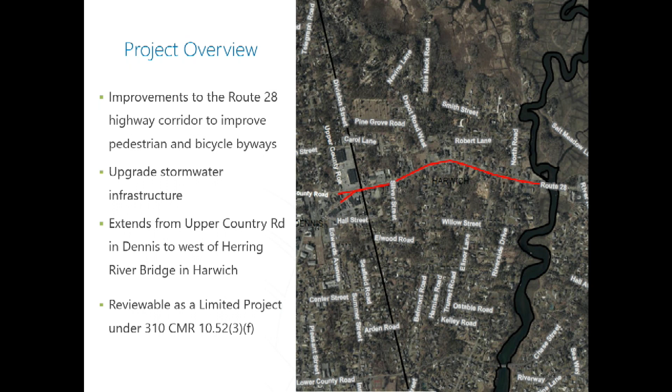Quick project overview: this project proposes improvements to the Route 28 highway corridor to improve pedestrian and bicycle byways, as well as upgrade the stormwater infrastructure. It extends from Upper County Road in Dennis to just west of the Herring River Bridge in Harwich. The work is reviewable as a limited project under 310 CMR 10.52(3)(f).

Looking at the wetland resource areas we're working in proximity to, we have the Herring River, which supports land underwater, land subject to coastal storm flowage, riverfront area, bank, bordering vegetated wetland, salt marsh, and the associated 100-foot buffer zone and 50-foot no disturb zone.

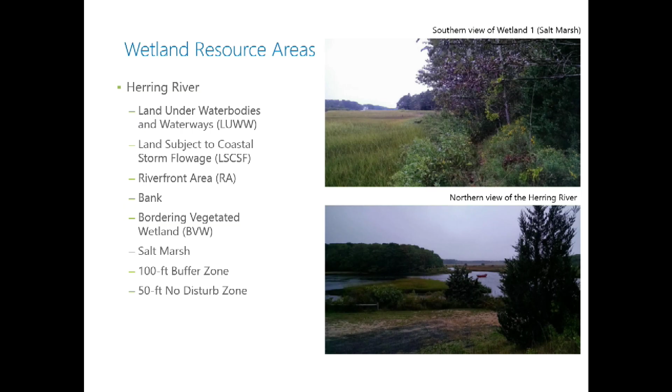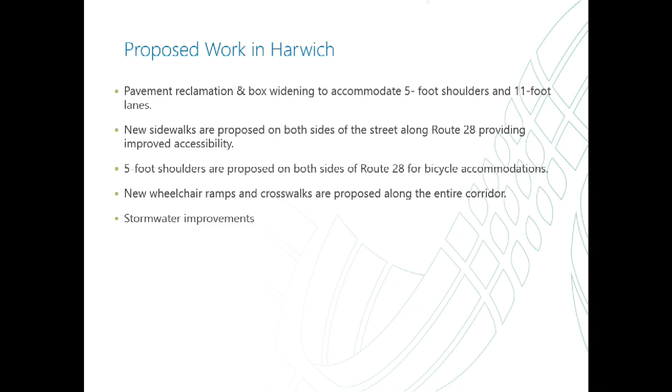I'll tell you more about the proposed work. Overall, the entire project from Dennis into Harwich proposes to widen the roadway via reclamation of the existing pavement and box widening, to get a consistent roadway section of 11-foot lanes and 5-foot shoulders. This will reconstruct portions of the road with existing sidewalks, and add sidewalk where there isn't any, giving complete pedestrian accommodation on the north and south sides, connecting from the Herring River Bridge into downtown Dennisport.

As part of that work, there will be new ADA-compliant pedestrian curb ramps and driveway transitions built into the sidewalk on each side of the road, making this a fully ADA-compliant project.

Underground, where we won't see it in the end, there will be significant stormwater upgrades to the corridor. We'll go into more detail later, but there's a lot of sporadic drainage which will be improved with this work.

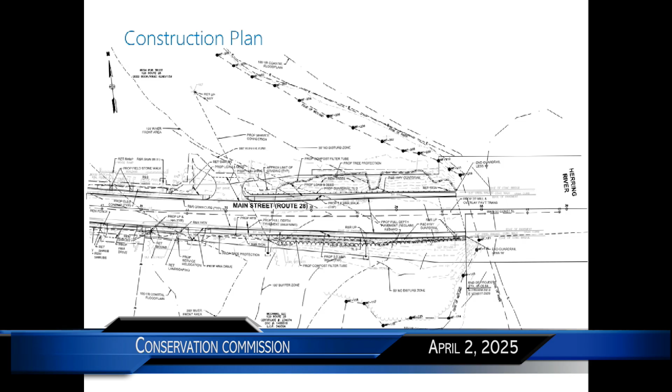This is our construction plan of the east end of the project, which is what we're here to talk about tonight, the Herring River. The river is on the right side of the image here. The bridge joint is currently our limit of work for physical service improvements, so we're not doing anything to the bridge.

The sidewalks will be reconstructed on the north and south sides of the roadway up to the bridge, meeting the existing sidewalks already on the bridge. The roadway itself is wider here than the typical section throughout the corridor, but we're matching the existing width at this point, tying into existing conditions for a smooth transition onto the bridge heading east.

The work off the road involves some slope improvements. As part of putting in the sidewalk, we're going to standardize the width of the walk and the guardrail behind it, and push out the rollover point of the slope a bit on the north side. That will necessitate some vegetation removal on the slope. We have a replanting plan, and I received some earlier questions about coordination through Amy, so I have some updates I can give you verbally.

On the south side, the work is limited to minor clearing of vegetation to support resetting utility poles. The poles will move from the sidewalk today to the back of the sidewalk, which will trigger just a little vegetation clearing, more trimming than clearing. So the south side has more limited tree work than the north side.

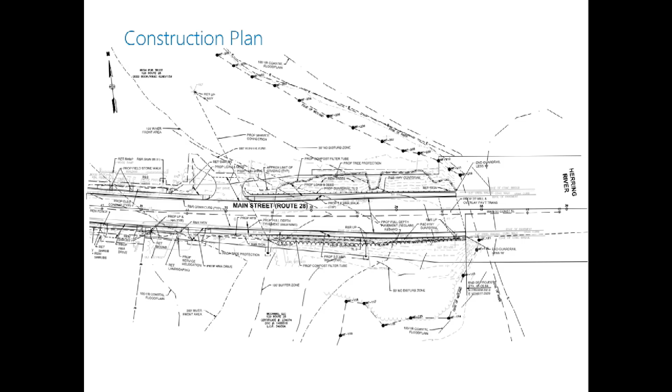The stormwater design is compliant with Mass DEP stormwater standards. This is viewed as a limited project because it's maintenance and/or minor improvements, so it's compliant to the maximum extent practicable with the stormwater standards.

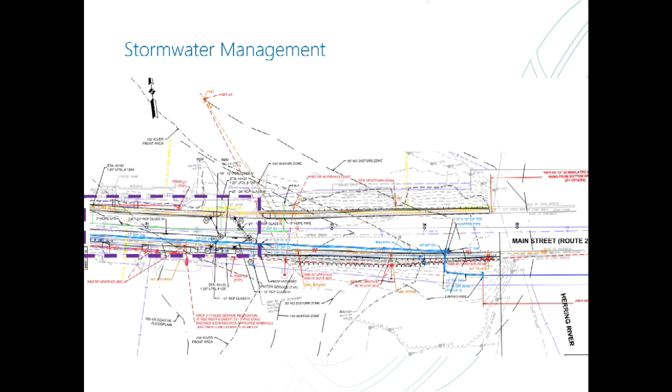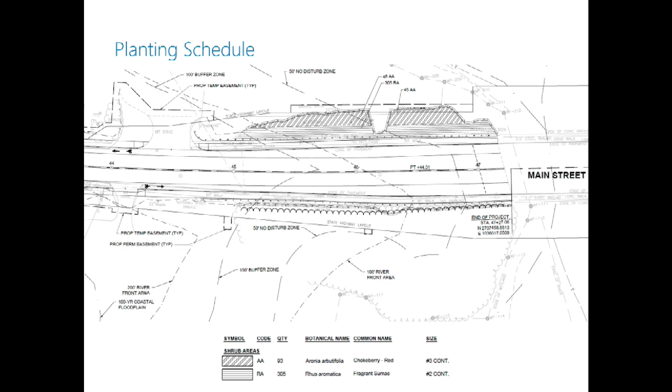And I will turn it back over to Bridget to talk about the work in the resource areas.

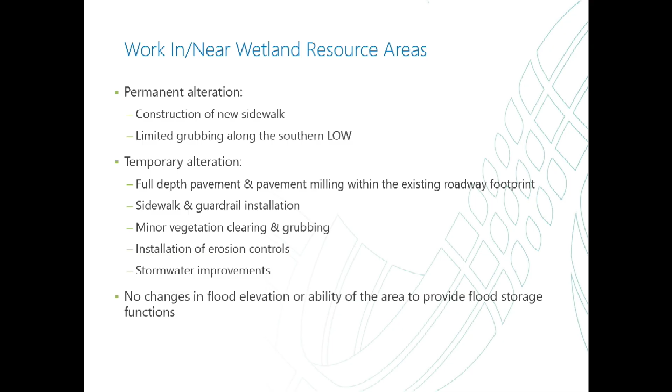Thanks, Steve. So as part of the project, there will not be any work within Salt Marsh Bank or BVW. The work will be limited to the land subject to coastal storm flowage, the riverfront area, and then the 100-foot and 50-foot buffer zones. Looking at the permanent alterations, this will include the construction of new sidewalk—you'll see when we go to the next slide, there's a small strip of existing grass, and that's the area impacted by the sidewalk. You can see that here in the green and orange coloring. This will also include limited grubbing along that southern limit of work, as Steve mentioned.

Looking at the temporary impacts, this will include the full depth pavement and pavement milling within the existing roadway footprint, as well as the sidewalk and guardrail installation within the footprint, and associated minor vegetation grubbing, installation of erosion controls, and stormwater improvements. We'll note that within this zone, there will be no changes in flood elevation or the ability of the area to provide flood storage functions as part of the work.

The next slide depicts the impacts to the buffer zones more clearly. The inner red portion is work within the 50-foot no-disturb zone—approximately 4,231 square feet of work. The teal color is work within the outer portion of the 100-foot buffer zone, about 10,308 square feet total. The purple hatching is the work within the riverfront area, showing the currently degraded riverfront within the project site—about 19,180 square feet of that degraded riverfront.

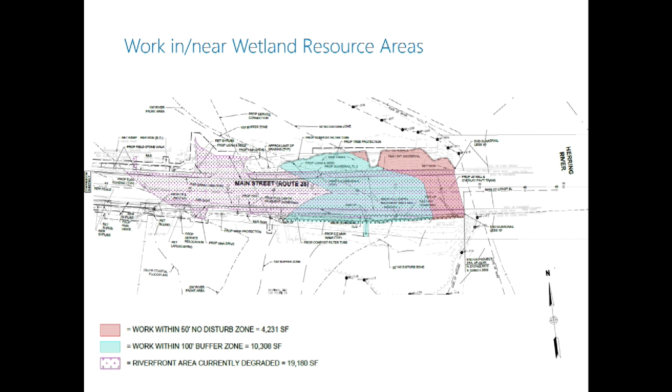In our next slide, we present some of the mitigation measures—the erosion and sedimentation control plan we're proposing as part of this project. We are proposing to install erosion control barriers, as well as catch basin inlet protection and tree protection. At the completion of work, we will loam and seed with a native seed mix to restore any disturbed areas.

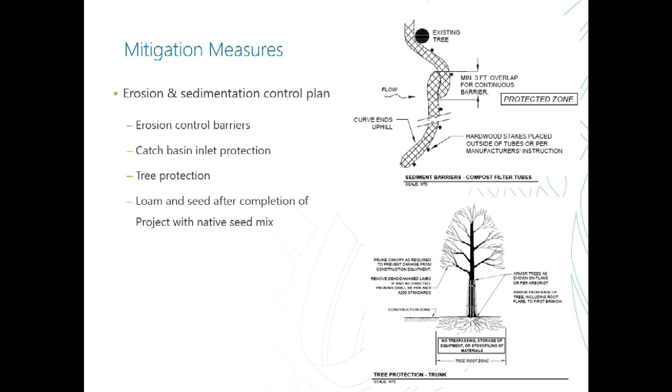And I think with that, that's about it. If anyone has any questions.

So we're going to match that. We just match into it. Ah, I see - as we get away from the bridge going west, it comes down, tapers down a little bit.

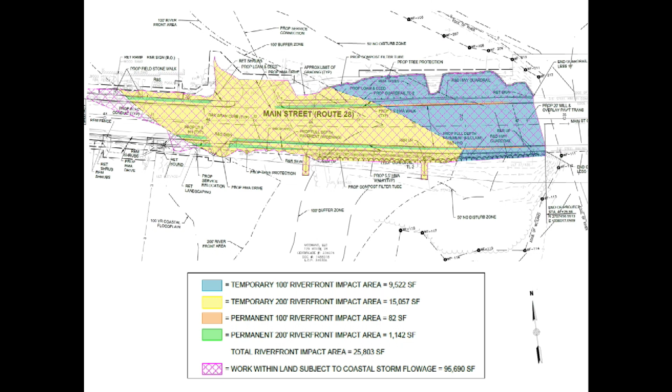And so you're adding bike lanes here, which is great, but what about the other side of the bridge? It's great to have those bike lanes, but one would think you'd want to continue them all the way into Harwichport. We're trying to get all the way to P-Town, but we gotta take it in sections.

So are there plans? Yeah, I think the department, especially District 5 and Taunton, has a vision for what they'd like to see on Route 28 that we've been trying to implement. And we're doing that in a context-sensitive way. So what's going on here in this section of Harwich, which is sort of a historic section, is more or less in keeping with what's out there today - we're not adding a full bike path on one side of the roadway, whereas in Yarmouth, we are.

And West Dennis, we are too - Route 28 West Dennis has a shared use path. But the section of Dennis going into Dennisport that I referred to at the beginning does not. It's more or less what this project has, with the 5-foot shoulders and 5-foot sidewalks. It does provide some accommodation for bikes, but not off the roadway.

It's still a balance between the context that the roadway is passing through and the number of bikes and so on. With all the motels in Yarmouth, there's a lot of bicycles, especially in the summertime. Hopefully there are more when you get into Harwich as well. So that's all I had.

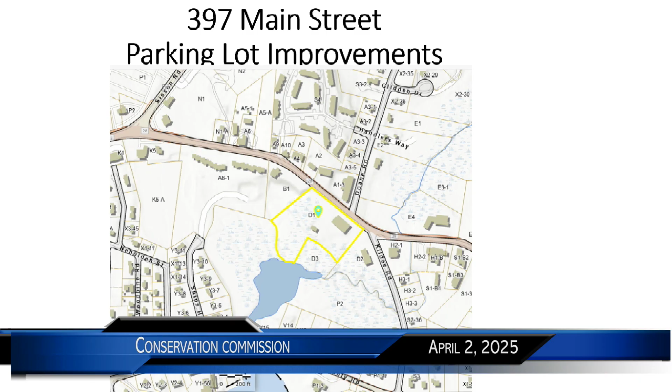Okay, much better. Good evening. Deja vu from 2020 on this. Just to make sure everybody knows where we are, we're a little bit to the north of Allen's Harbor here. I think Jeff described it pretty well—everybody knows where Handler's Auto Yard was. Next slide.

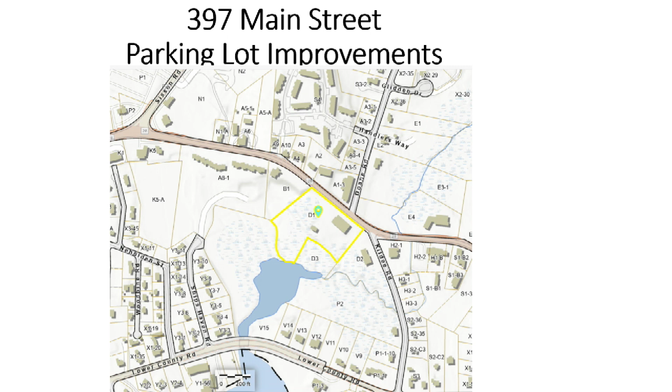No, he's got it. There we go.

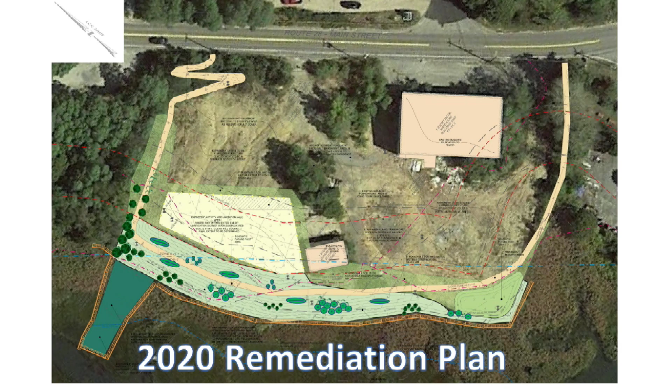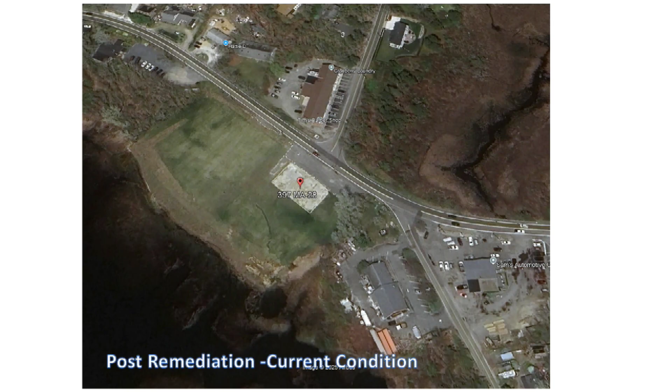In fact, this is what Google Earth shows today, and I probably don't need to explain this because you drive by and see it's all green. Jeff's exactly right — it's a gorgeous site looking out over the salt marsh.

So we have a couple of things going on here. There's a coastal bank out there, and we're near it, but we're not working on the coastal bank — no work is proposed there. Land subject to coastal storm flowage, which is set at elevation 11, we have about a half an acre of work in there and about 1,100 cubic yards of fill.

And why do we need this fill? Well, when you design a parking lot, you like to keep the slope at no steeper than 4%. That's the point where a car door starts opening by itself and slamming into the car next to it. So that's the rationale for leveling this lower portion of the site.

And the riverfront, which covers some of the site, actually gives you some exemptions, to put it in short term, if it's a previous junkyard — Jeff started this discussion off telling you what it was. It's very rarely when you have a one-for-one match from the regulations to what it really was. So those are the three resource areas we're dealing with, and we'll walk you through this in a minute.

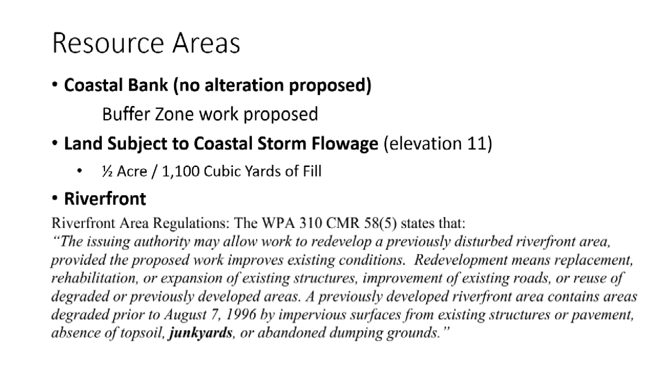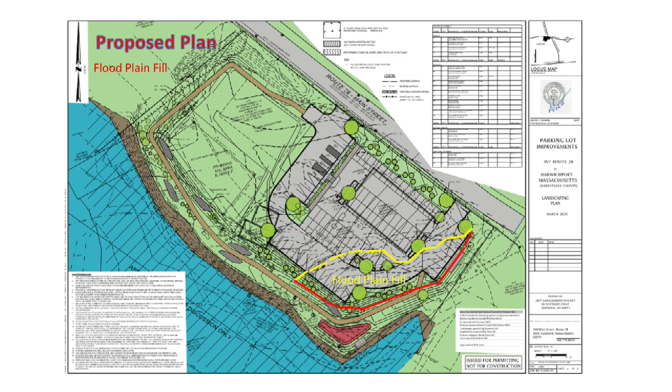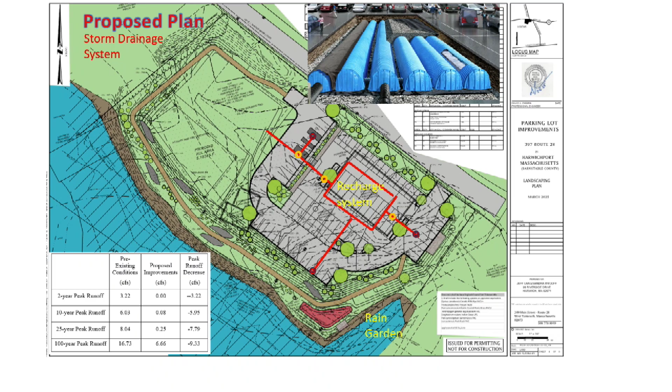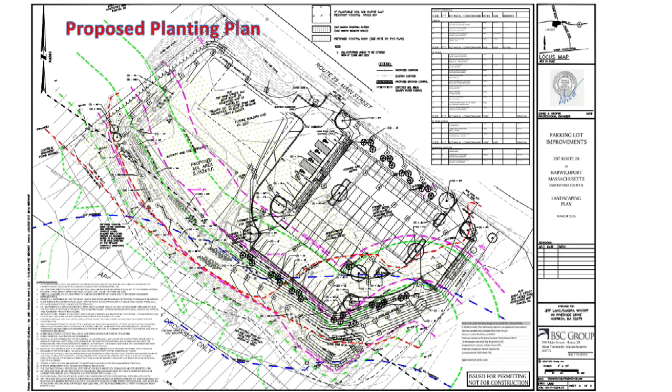That was not completed, basically due to COVID and lack of supply. Jeff, I think you said it's scheduled to be done immediately, but I decided to show them all on the same plan so we saw the big picture. Other than that, there's a series of trees going in the parking lot, and a series of North Atlantic cedars going along the roadway to try and dress this up.

This is the big picture. The lower right red circle, the boomerang-shaped thing, is the rain garden proposed to take the lower portion of the site. All of the parking lot goes into that storm drainage, along with perhaps a future building up in the green area to the left.

That rain garden is in the current location of the one we built during construction, but it was really just a temporary one, in the same location. It needs to be dressed up, reformed, and reset.

The footpath, the light tan line going around, is the foot trail we had before. It's been modified somewhat to go from parking lot to parking lot instead of from the street, but you could still walk down the driveway and around the walkway. That walkway is in the terrace about halfway up the bank, purposely designed to be above the 100-year floodplain.

Next slide. That's it, that's the last one. Okay, so we're at the question point. That's a very brief overview.

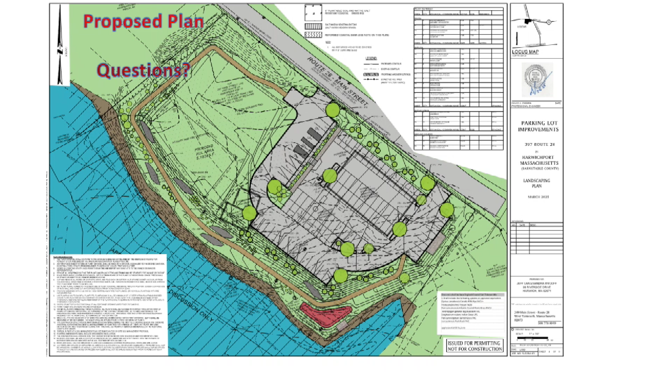And I know Amy had a few questions this morning. Amy, do you want to chat about those, or what's your pleasure? Sure, we can chat about them.

But first, let's just say we did get a DEP number today for you. And in the letter from DEP, they had a couple of comments, so I would trust you're going to get back to them, and I can just read them quickly for you.

Is there currently an absence of topsoil on the lot? Per the Rivers Act, if the lot is not currently degraded, then 10.584 would apply. Instead, to me, this lot was degraded prior to 1996 when the Rivers Act went into place, and was degraded until recently when you did the remediation. So I think you're correct in interpreting it the way you have, according to the Rivers Act regulations. But I bring it up because they're questioning it, and ultimately they need to be okay with it too.

She wants you to confirm that the restoration of the riverfront area on the property is 1-to-1. You've done, according to what you've shown, way more than that, so provide them a copy of what you provided us today. That's an easy way to handle it. And then just send comments to the person who wrote this, Jacqueline Sidman over at DEP.